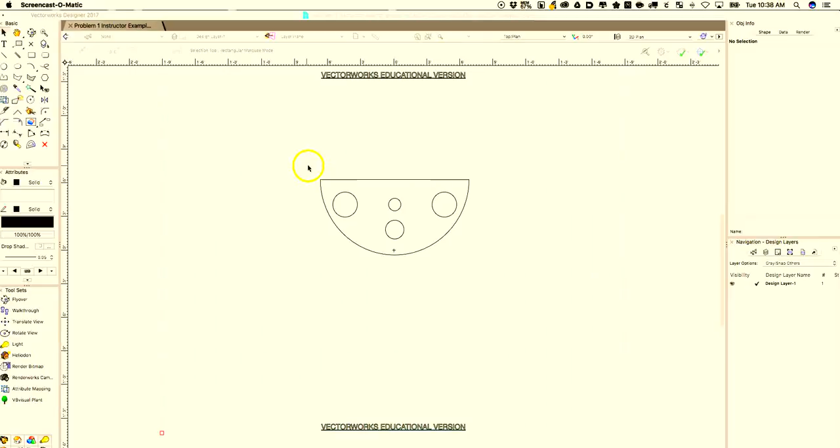Here is problem number one. I'm going to show you how to do it.

I already have the 2D part of it drafted. I was able to use the intro CAD project and I scaled it up.

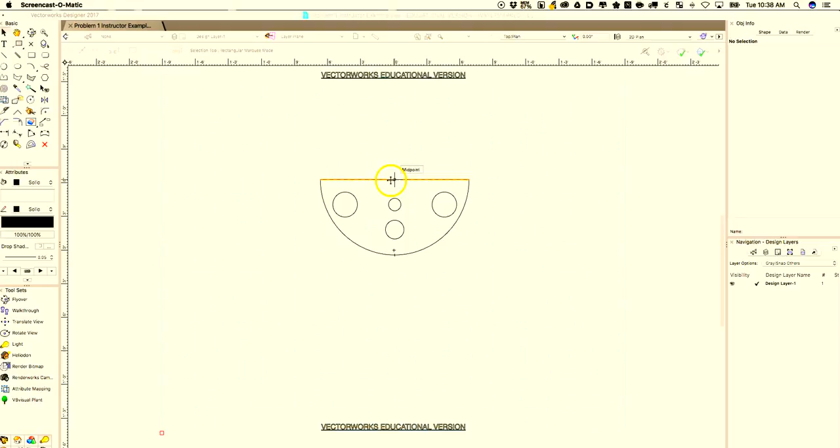The first thing we need to do is make the top line and this arc into one object. So we select both items, come up to Modify and Compose. That turns the two objects into one, and now it's a polyline, as you can see.

Before we extrude something, we want to make sure it has a fill. As we can tell, it looks like this guy has a fill.

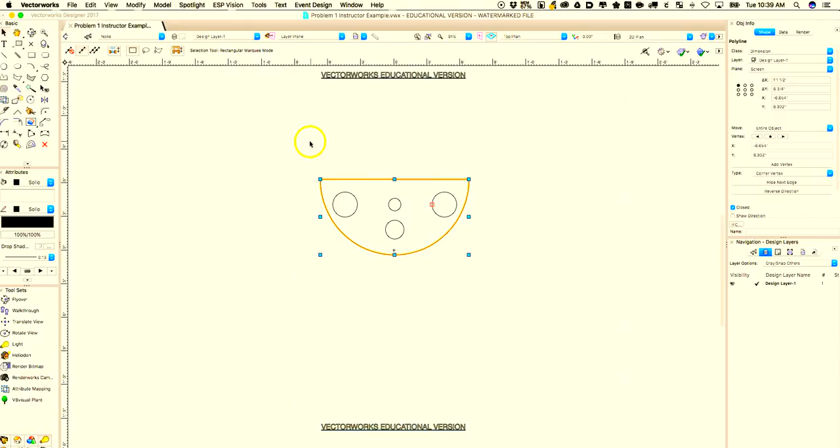So we come over here to Model and Extrude. Looking at the drawing, this piece needs to be 3 inches tall, so I'm going to click on extrusion and change that to 3 inches, click OK.

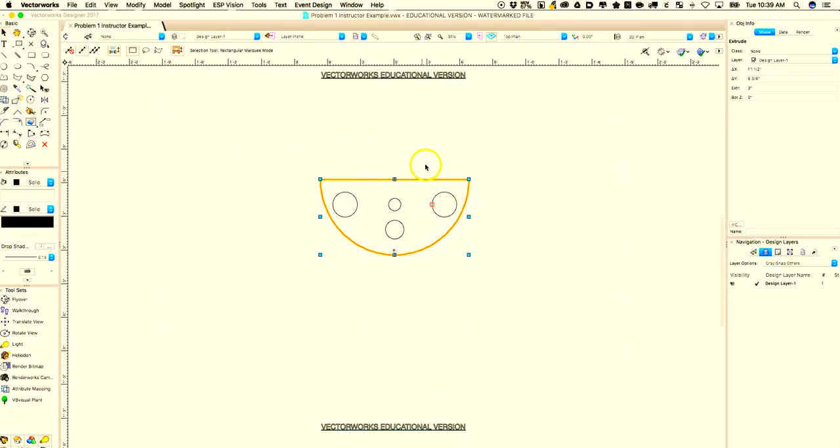Now the fill goes away, it looks like, but it's not. I'm going to come over and look in right isometric view, and there we have our object. Don't worry that these aren't lined up, we'll get to that in a little bit.

So here I'm going to go back to top plan view. The first thing I want to do is it looks like these guys right here need to be drilled all the way through, from the top to the bottom.

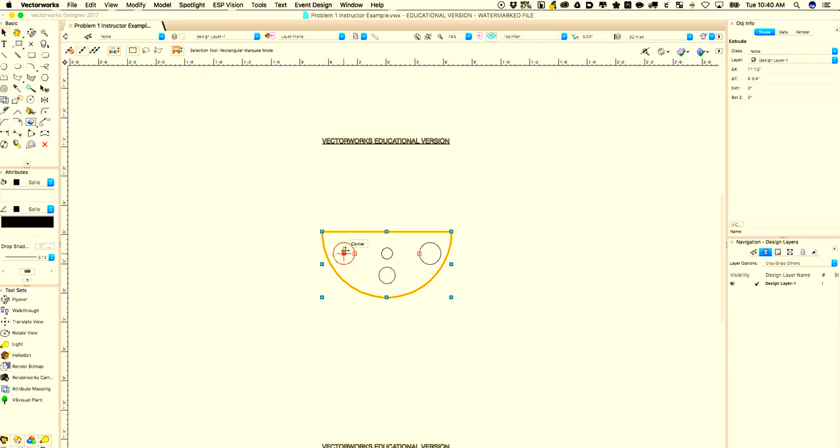So I'm going to select this circle and extrude it until it makes what I call a drill bit. We're going to drill out that hole, so I need to extrude this.

Now the important thing to remember in Vectorworks: if you want to subtract and make that hole appear, this circle needs to extend above and below the main object. So I'm going to show you.

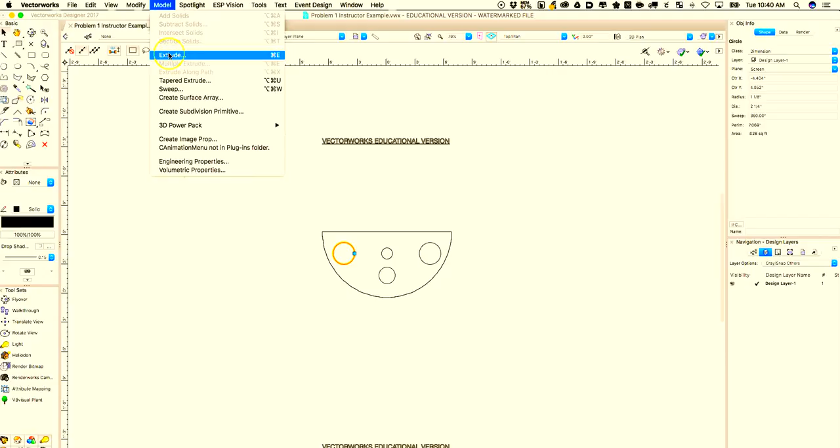This object is 3 inches tall, so I'm going to make this circle extrude to 5 inches. Come up here to Model, Extrude - you can also hit Control or Command E - and make this guy 5 inches.

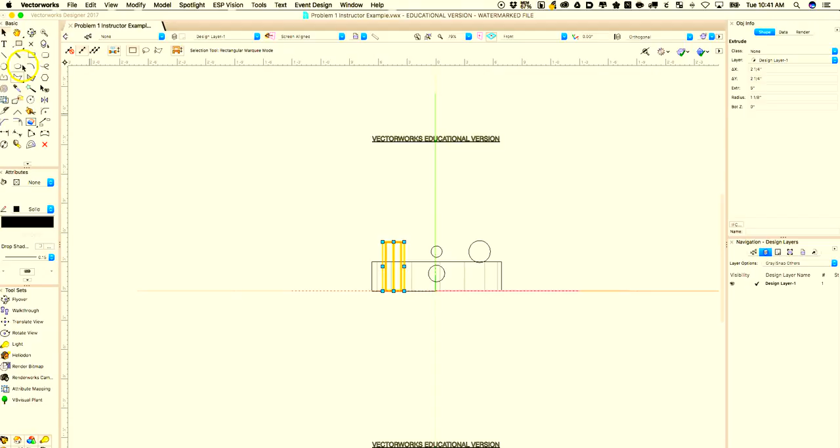Now, from the looks of it, it doesn't look like we did anything. But I'm going to change to front view, come up here, front, zoom in, and now you can see that this guy has been extruded.

I'm going to select him, hold down the shift key and the bottom arrow, and just nudge it down - it doesn't have to be exact, but there's some sticking out the top and some sticking out the bottom.

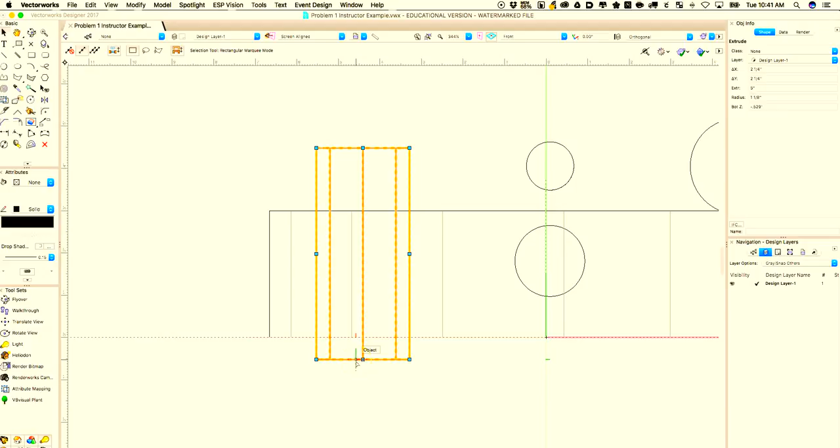I'm going to come back to top plan, and use one of our friends from intro - mirror. I'm going to get rid of this guy, and mirror him over.

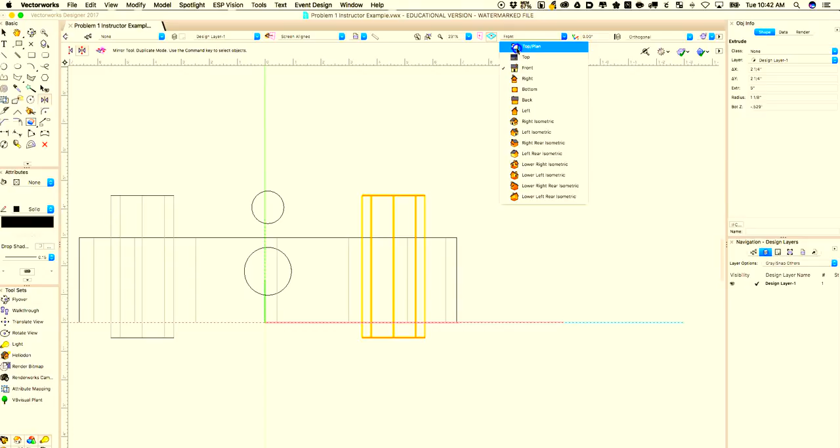So now, if we go to front view, we have both guys sitting there. When I subtract things, I usually like to do it in isometric so I can see that it's happening. So first I want to subtract - I want to make a hole.

You need to select the piece you're going to cut and the cutter. So I'll pretend this tube is the drill bit, and this is our object.

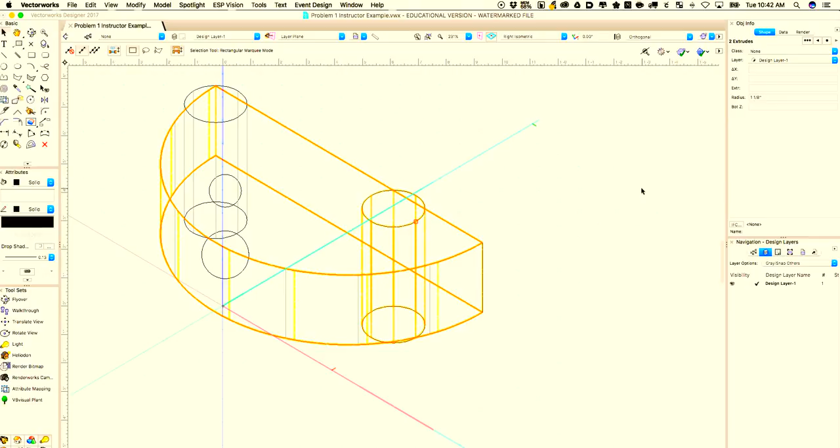I have both of those selected, then come up here to Model and Subtract Solids. Now it's asking us: select object - what object are we taking from? We're taking from this, and it's highlighted. You see I can go back and forth. So we want this, I'm going to click OK.

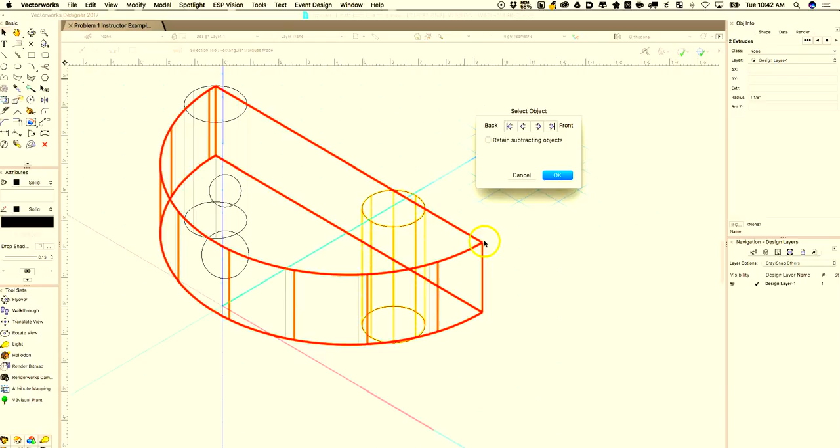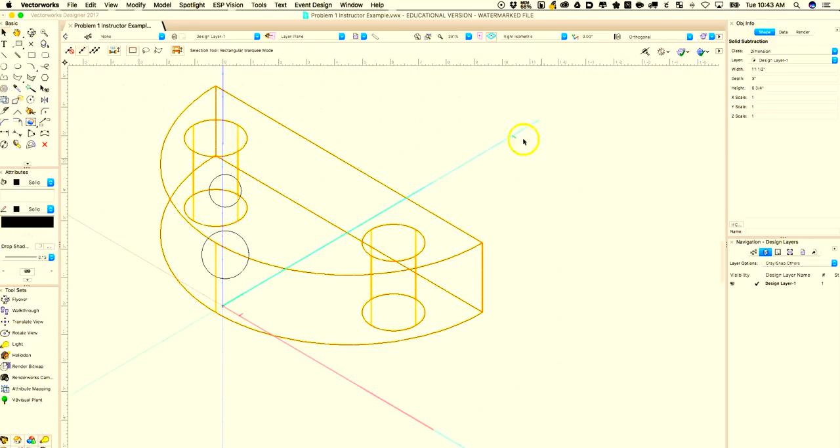And voila, there is our hole cut. We're going to do the same thing over here - Model, Subtract Solids, need to change that to this guy. And there we have our two holes cut through the object.

So I'm going to come back to top plan view again, save it quick. Now let's see - the other day I mentioned this kind of looked like Rolie Polie Olie.

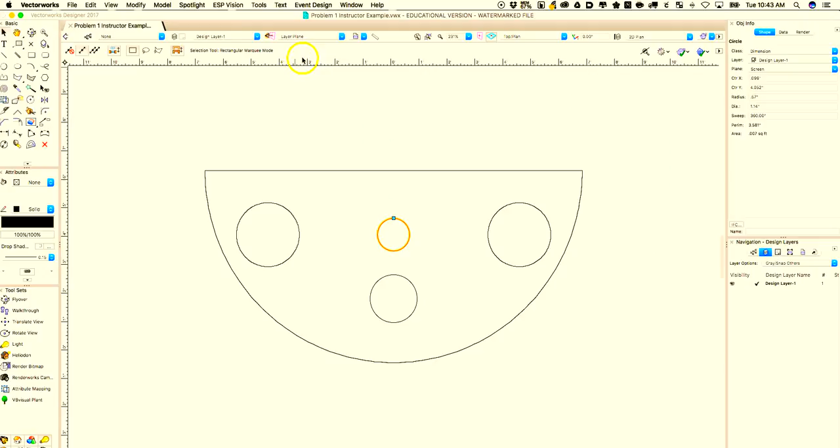So the next thing I'm going to do is make his nose. I'm going to select this guy. Looking at the drawing, Roly's nose is exactly 4.5 inches tall, so I'm going to extrude him - Model, Extrude, 4.5 inches, enter.

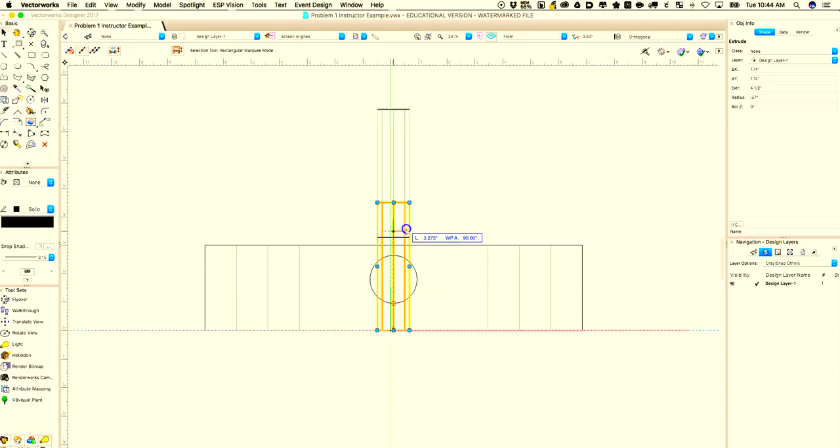Now I can come to the front view or side view. I need to move him 3 inches. One thing I could do is grab him, and to keep him right in that plane, hold down the shift key and raise him up above.

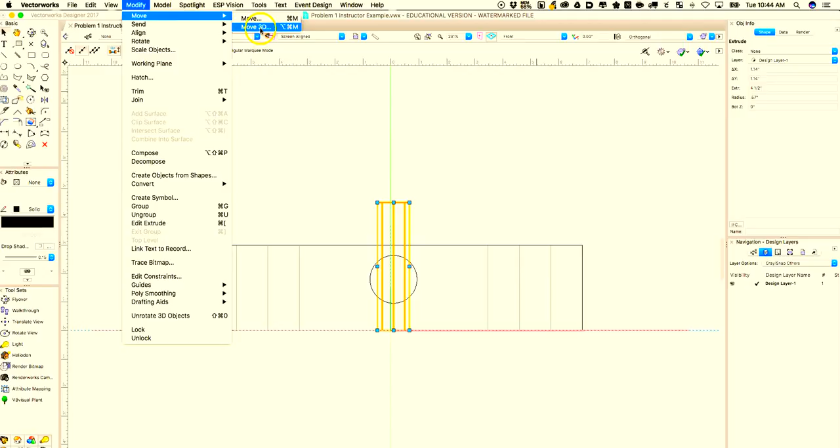I want to move in the Z - the Z is up and down - so I go 3 inches, and there he puts it right there. So now we have our nose done. Come back to our top view.

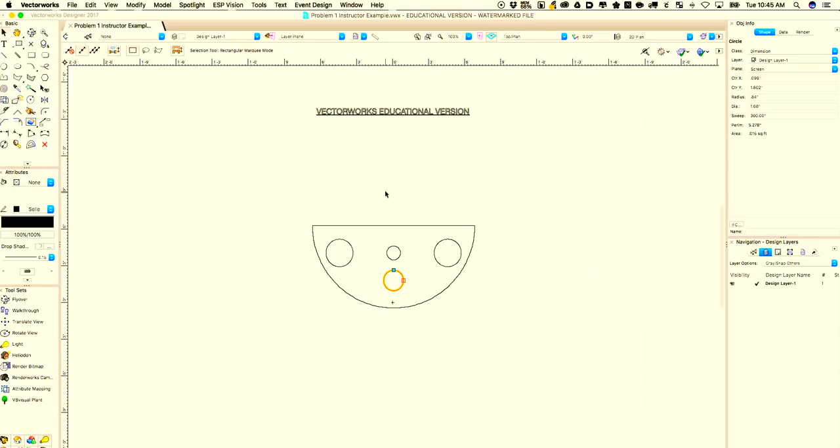Now let's do his mouth - Rolie Polie Olie's mouth is 2.25 inches. Another way to get extrude is to hit Control or Command E, and I want his mouth to be 2.25 inches. Come back to front view, and now I'm going to Move 3D.

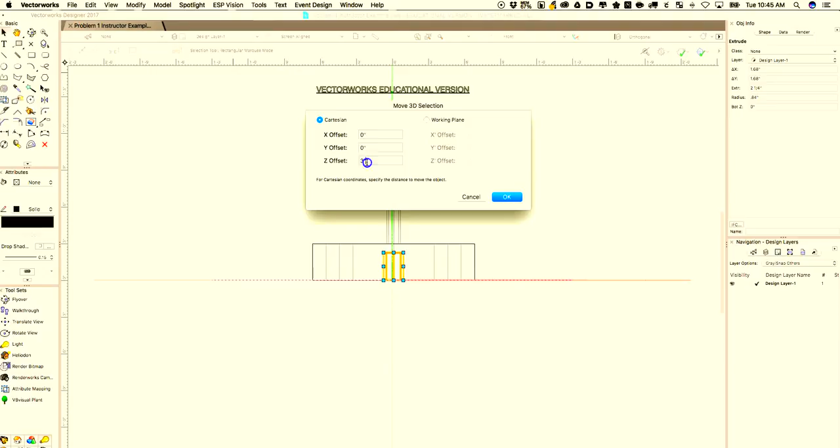I'm going to change that to 3 inches again while it's there. So now we have our object.

Now I'm going to come over here to right isometric and let's look at it. Let's save that, let's look at it in the right side view, and it looks almost like your drawing. So that right there is how to draw problem 1.